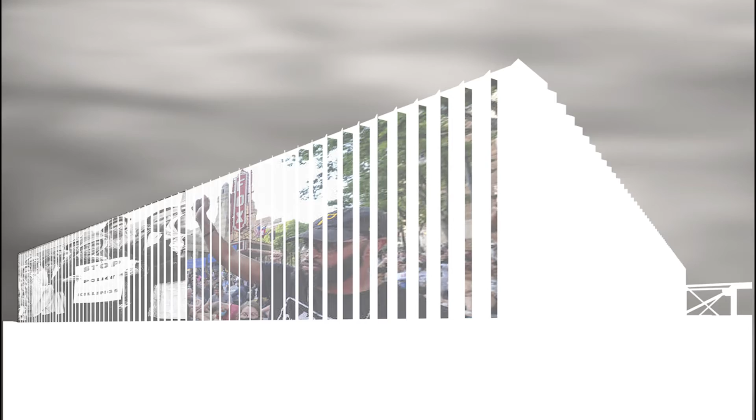It's unreal to witness here, Chris. This police line, we just saw an officer extracted. An officer was down, we don't know exactly how they were injured. Another officer here that was standing on these steps took some glass in the arm. These demonstrators are ready to confront these law enforcement officers. You have law enforcement in heavy tactical gear, protesters that are clearly ready. You just see something else happen there. Another demonstrator threw what appeared to be a large object.

The near future of architecture must contain radical architecture. Radical, of or having roots, meaning going to the origin. For architecture to become radical, it must explore its past, present, and future role in sustaining its origins of oppression and systemic racism. It must practice an art of refusal against the long history of complicitness in architecture and urban design. What does it mean for a space to be democratic? Radical architecture must bridge the gap from past racial transgressions and move forward to a more inclusive and equitable environment to allow freedom and access to all people.

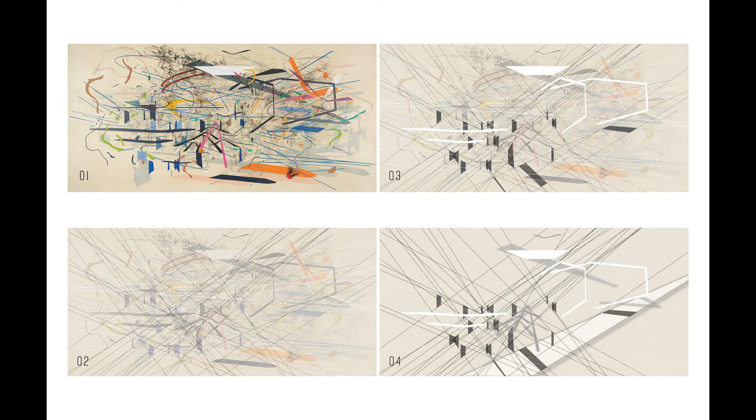At the beginning of the semester, we were all tasked with analyzing a certain piece of art. I was lucky enough to study Retopistics, a renegade excavation by Julie Mehretu. The original analysis can be seen here, where I started by bringing out prominent lines and planar elements to discover the structure of the piece.

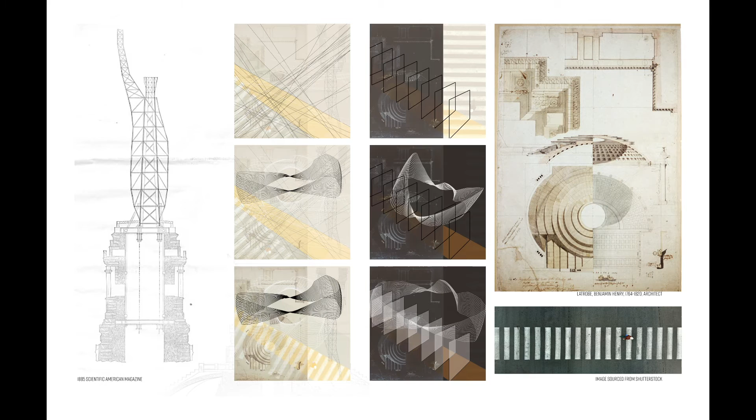Moving forward, I took the information that I learned from the original piece and used that knowledge to create works of my own. Like Mehretu, using prominent architectural imagery as the backdrop for her work, I chose to use strong and stable American imagery as the background for my piece, those being the structure of the Statue of Liberty, the Capitol Dome, and the crosswalk.

The crosswalk has strong symbolism with the topics being discussed today. It is used as a vessel for passage from one space to another. It brings people together and is a safe haven for travel through a dangerous environment.

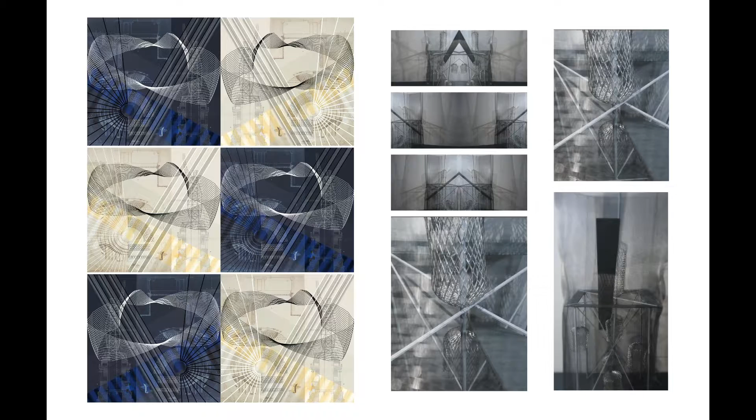Based on the original iterations, these are the final works created, including drawings and a creation used to explore spatial depths and intricacies based on principles found in the drawings. Creating these images from the original model were inspirations that show up in several places in the final proposal.

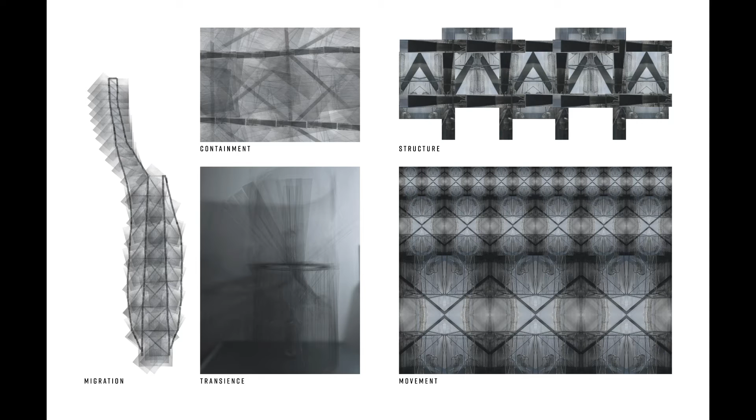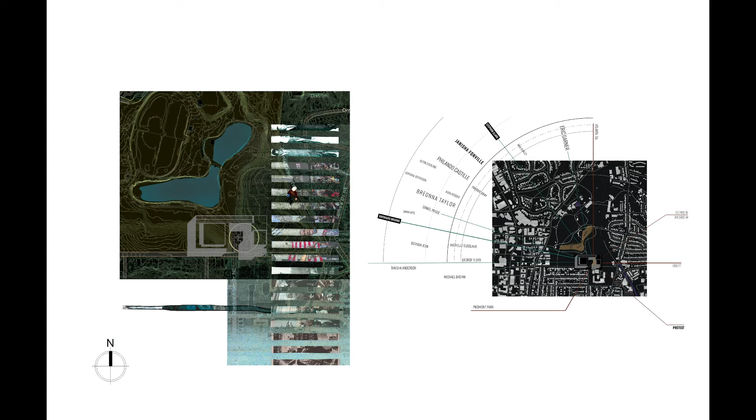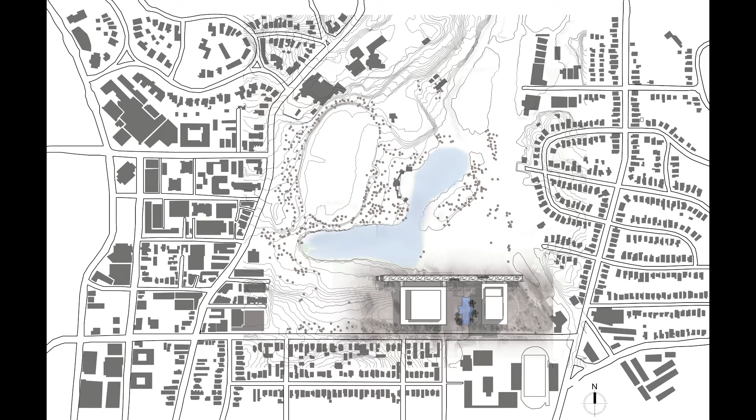Looking at our site from the scale of the city, you can see the densely urban conditions that surround the area of Midtown Atlanta. Bordered by 10th Street to the south, I have chosen to accent the old site of the original Negro building and orient my building around this site, bringing a once castaway part of the exposition to the front and center.

Zooming in a little bit, I have oriented my proposal parallel to 10th Street and keeping the same entrance from Charles Allen Drive and 10th Street that exists today. This is the main access point from outside the park.

On the first floor, we have the main theater space in the building on plan left, the old Negro building site, which has been converted into a reflection pond and sculpture garden for all to access, and the Climate Hall and Justice Center on the right, housing a large gathering space that can open up to the exterior to allow for free access between interior and exterior.

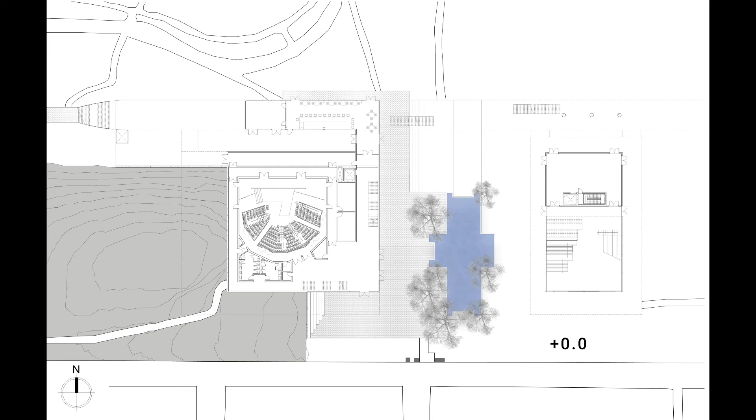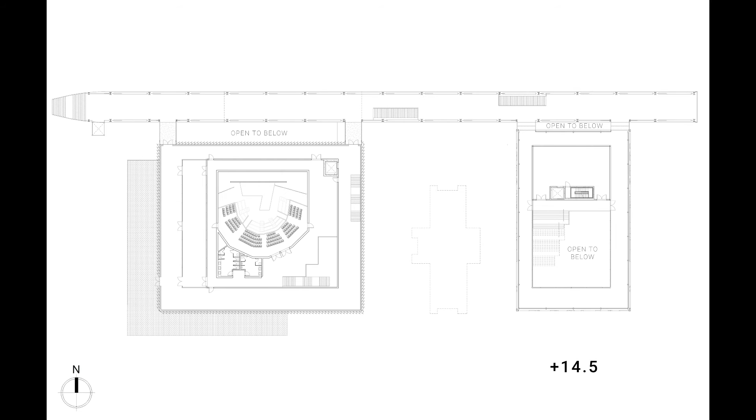The second floor, we have the balcony seating area for the theater, and in the portion of the building that wraps around the theater, we have the main gallery space to house exhibitions. In the Climate Hall and Justice Center buildings, we have the upper portion of the Climate Hall that can be accessed from the lower level using the stadium seating and stairs. Also, this is where the main connection to the bridge occurs, attaching at 2 points on each the theater building and the Climate Hall and Justice Center.

The third level is where the upper portion of the Climate Hall can be found, along with the rooftop access area above the Justice Hall. The circulation was designed to be accessible from any approach angle, attempting to create a space that is truly democratic.

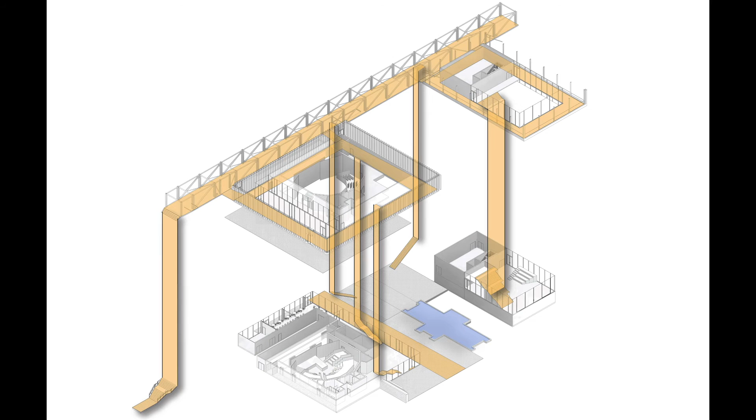In section, the quality of each of the spaces can be much better understood.

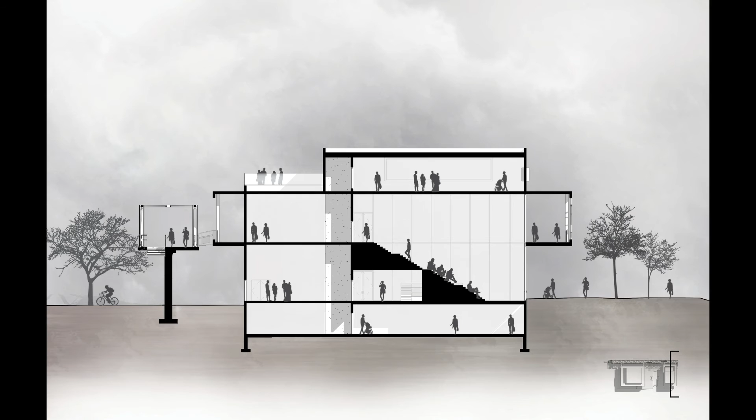The glazing surrounding the gallery spaces is to be a fin system that is composed of clear glazing, translucent glazing, and extension fins that will house a lenticular printing system so that when the building is viewed from one angle, you get one set of images. And when viewed from another angle, you get a completely new set of images.

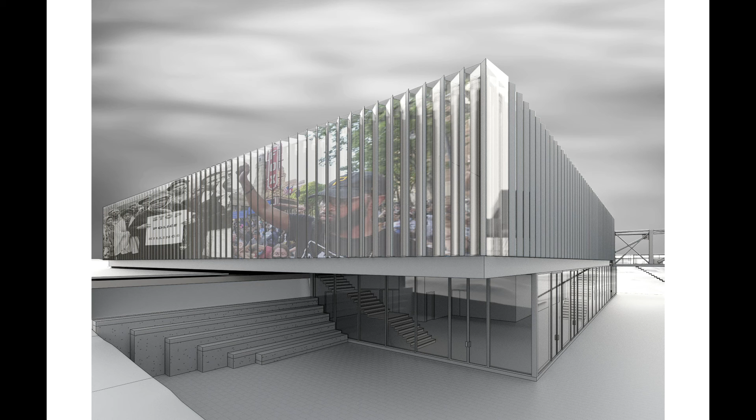I have designed it so that the main facade separating the interior from the exterior is composed of two 1-inch layers of glazing with a 6-inch air gap to aid in the heat gain and loss, aiding in the environmental sustainability of this building. Then the clear glazing portion is rotated at a 30-degree angle to maximize the sunlight protection on the south facade, and then the translucent glazing will house a set of images as it rotates back to connect to the next fin.

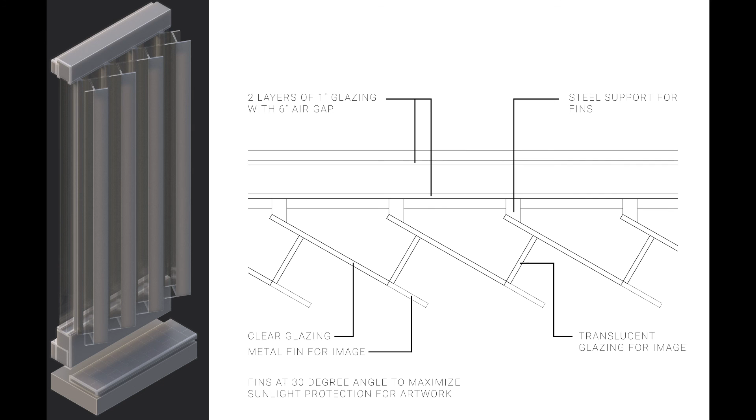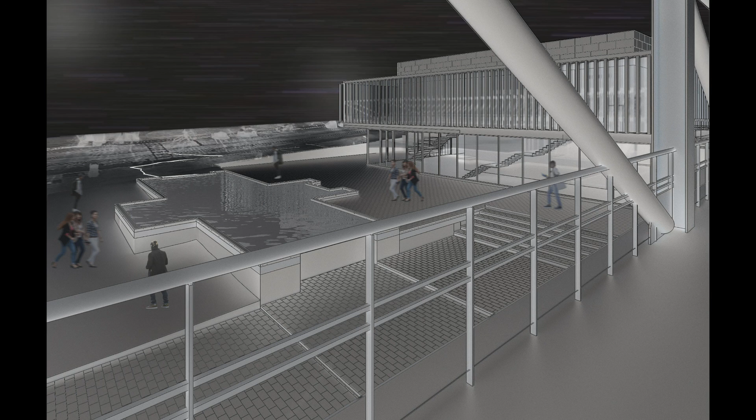I believe that this is the near future of architecture, a type of space that becomes radical, an architecture that rewrites the narrative going forward, an architecture that refuses to be upheld by the white power system it has dwelled in for centuries, an architecture that bridges the gap from past racial transgressions and moves forward to be a more inclusive and equitable environment to allow freedom and access to all people.

I close with a quote from Julie Mehretu that has inspired me throughout this entire project: 'That's what I'm interested in, the space in between, the moment of imagining what is possible and yet not knowing what that is.'